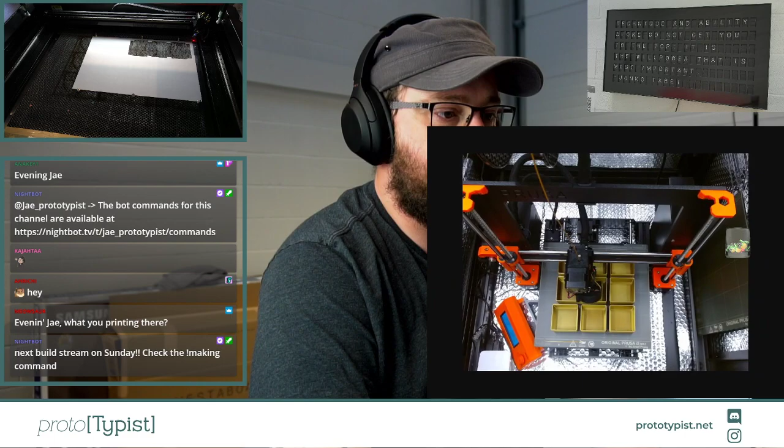So I'm printing a few things actually. Let me make one of these bigger for you so you can see. These are tubs based on different sizes for a series of drawers that I've got. I'll show you in a second what they look like - let me grab some and show you up close.

Excuse me, my hay fever is so bad today, I apologise guys. So I'm printing a load of these little tubs. I have thousands and thousands of screws and odds and ends, and a huge set of architect's drawers, a plan chest, and I basically made these to fit inside them. They're exactly the right depth of the drawer, they fit just nicely. I made them in all sorts of different sizes, so you've got like a 2-unit one. Some are even multicoloured so I can have different things in there and know what's in there if it's special. I've got loads of these - a whole drawer full. In terms of units, I should have 300 of these units.

This is a 1 unit - I should have 300 of that in the drawer. It's a thing and it's going well. They're all designed so that they stack together. We've got 3-unit ones, 4-unit ones, all sorts of different sizes. Basically they're going to hold screws, tools, bits - everything I could possibly need for any keyboard build, or any product I stock in the workshop that needs spare parts or anything else.

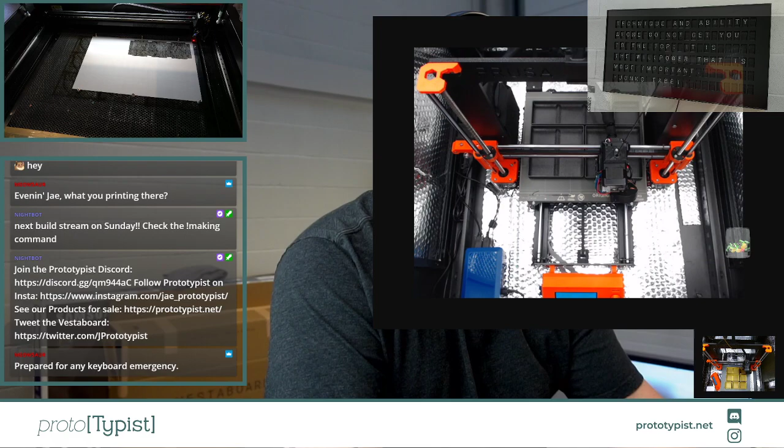The drawer is nearly 6 foot long, about 5 feet deep, but I'm only going to go about 3 feet deep into it with the pods. So that's what we're printing. We've got 2 printers going at the moment. On this one we've got a bank of 4 printing together, a bank of 3 printing across the back, and then 4 1-units as well. On the other printer, printing in gold filament, we've got 2 2Us and 5 1Us printing at the minute. They've been printing for about 4 days solid now, but they're getting there, slowly.

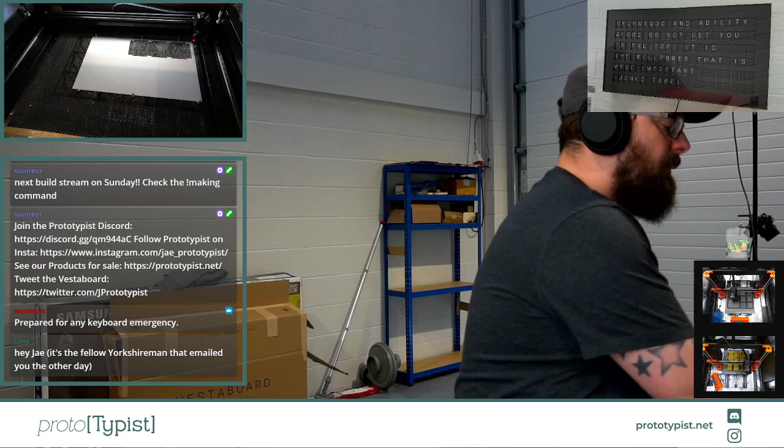So I can't show you the details here, but I do have a stack of orders. These are all customer orders. The plan is to try and get through all of these sheets of paper today on the stream, instead of just doing one order like we did last week, which was like 6 or 7 plates. We're going to try and bash through all of these orders today and get them all ready. Now, I can't show you the order details, and I can't tell you who they're for, or what keyboards the plates are for, but you're more than welcome to try and guess in chat. So if you see me cutting a plate and you think it's for a certain keyboard, I can't confirm or deny, but you can guess.

As you can see, we've already got a piece of material loaded in the machine. It's already had one plate cut out of it because I've been cutting plates all day long whilst we've been running the workshop and doing packaging and everything else. 600 orders in 2 days we've packed. 600 orders in 2 days, which is kind of nuts. It's kind of crazy.

We've already cut one plate on this piece of material. We're going to try and fit another 3 plates into it if we can, or if not, we'll definitely get 2. We'll get another one underneath, then we'll turn the workpiece around and do another one across the top on that thin bit. So you'll see we'll try and get another piece in just here, and then we'll turn the workpiece around and try to get another piece in just there.

We always cut horizontally on the laser for 2 reasons. One, it's slightly out in terms of being level front to back, so if you have a long piece, it does get slightly out of alignment front to back. That's a thing I can fix, and I will do that at some point. The other thing is that if you cut with the parts turned around vertically, sometimes if there's an issue with the laser and the CNC instructions don't go through correctly, it will make more of a mess of the work material than it does if you do it horizontally. So it's more about being efficient and keeping space more than anything else.

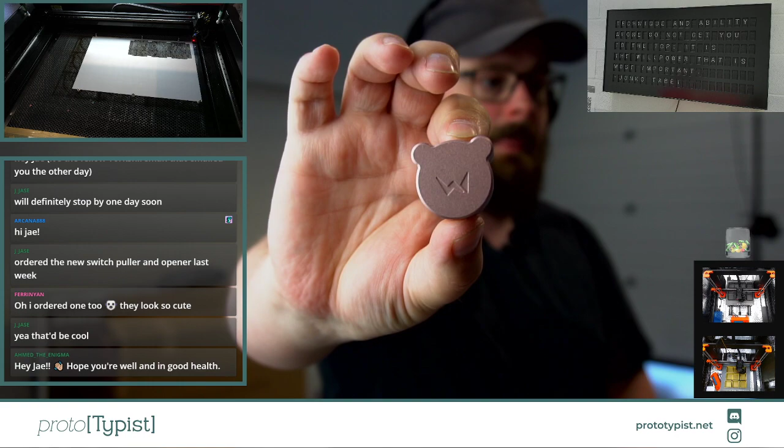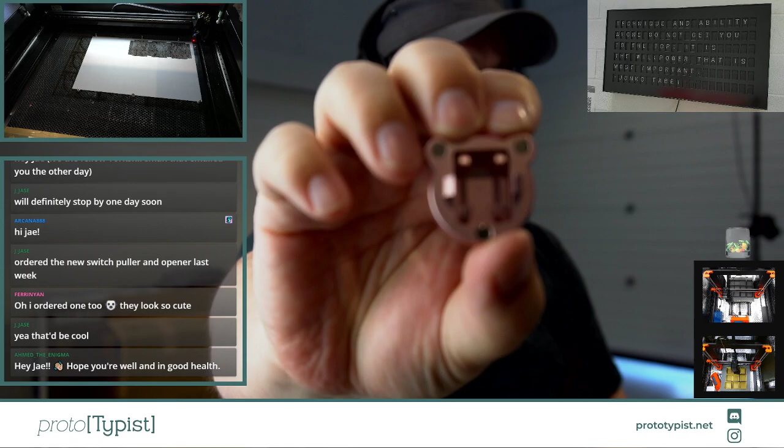And then inside, we have the little bear-shaped Wuque switch openers. This is the pink one. It comes apart, it's sealed around the sides, logo's only on one side's flat. These are held together magnetically, and inside you have an MX switch opener, which is super cute. And then on the other side, you have a Kailh switch opener. So there you go, that's what you get.

They're made of aluminium. And I apologize guys, hay fever, it's terrible, I can't breathe properly, so I do apologize.

But yeah, there you go. Made of CNC aluminium, these are all aluminium. They're super, super cool and super cute. The little bear design, it's both functional and it's cute as well. So it looks cute, but it actually helps you when you're holding the switch in there, because you've got a little ridge here that you can put your finger between, and when you're pushing the switch down it just gives you something so this isn't going to twist out of the way, because the ears help you hold it, I find. But yeah, really cute and really nice and well worth the money.

So there you go, almost sold out.

Ahmed's here as well, he says hey Jae, hope you're well and in good health. Yes, my back's getting better, it's slowly getting better, it's not 100% yet. I can't lift anything heavy, which means that the bathroom renovation that you guys might have been following on Insta is still on pause. I can't lift the tiles to tile the bathroom at the minute, but hopefully soon. We'll see how that goes.

Drexler's here as well, hey man, good evening, good to see you, thank you very much for being here.

Okay, so let's load up the software, the Fusion software, the Lightburn software that we're going to use today, and I'll show you guys how that works.

There we go, so you can see we've already got the plate file that we've cut out earlier on. What we're going to do is get the next plate file ready. You guys won't be able to see this in detail, but I'm just going to get the next plate file ready, I have to check my paperwork and make sure I've got the right one. Okay, so I'm going to drop this file in, and you'll see that a file's now appeared in here. Now we know that we need to make sure it's in the right position. So we've already got a piece cut out, and we know that the yellow is the piece that's cut out. So I'm just going to move this so it's roughly underneath where it'll be on the piece of material, on the workpiece that's in the machine.

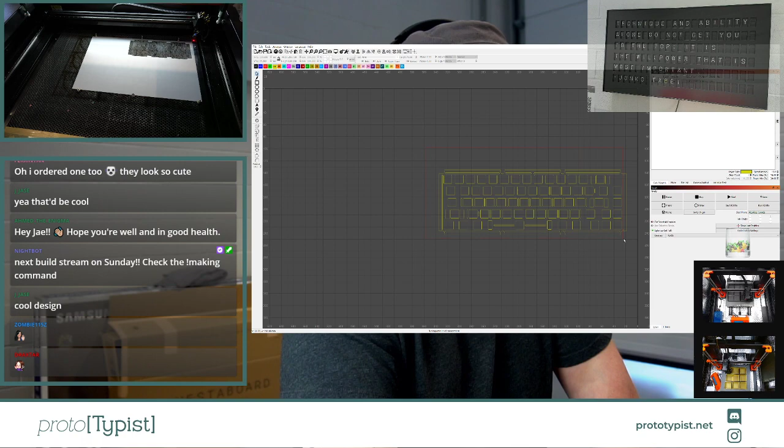Now we don't want to cut the same plate at the top again, so we're going to remove that. The other thing we're going to do is flip this plate round, so now it's in the correct orientation. You've got the ANSI enter on the right hand side, and the full left shift on the left hand side.

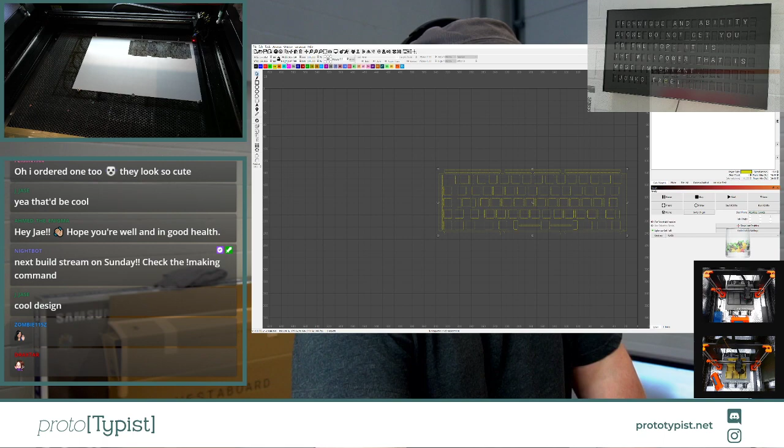Because the laser kind of melts through the plastic a little bit, we're going to flip that plate over so that from the other side you won't see the melt marks. The side that goes down towards the PCB will be the side that has the melt marks, and the top side will be nice and clear. So I'm going to flip that over, and there you go - that's basically now cutting from the top side down.

Once we've done that, we're going to click the send button on the far right side of the screen. That's going to send it over to the laser cutter. Then I'm going to pop over to the laser cutter, and on the laser cutter there's a setting - I can't show you this - that basically makes sure all of the correct parameters are being carried across to the machine. Nice and simple.

Okay, and that's it. We're done in Lightburn for now.

Let's pop over to the other camera so you guys can see it up close. So there's the laser bed, you can see it up close.

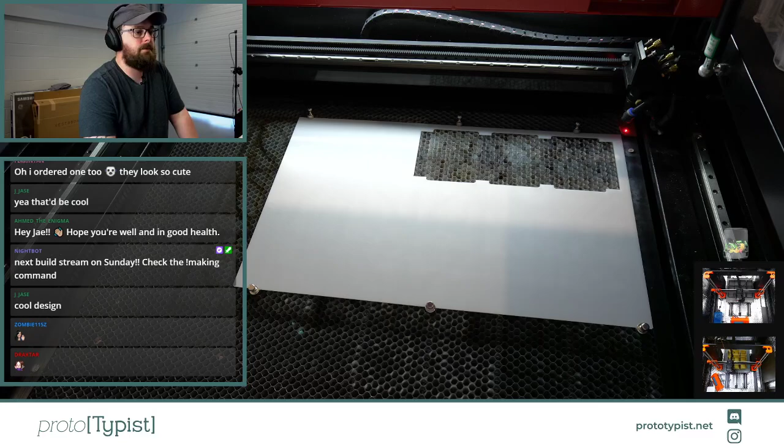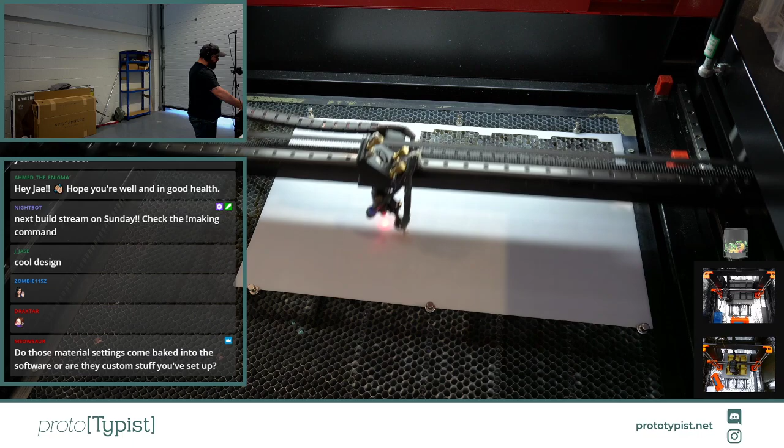The next thing I'm going to do is frame where the laser is going to cut, so you're going to see where the laser is going to cut this file out. That red dot is pretty much where the laser is going to cut. We can see it's going to cut nicely in this area. It's not going to overlap lines we've already cut, but it's not going to quite give us enough material on the bottom to get another one through.

We'll start that going anyway, and that's now going to cut, so you guys can watch the laser cut through the material.

Zombie's here as well, he waves. Hey man, good to see you.

Meow asks, do those material settings come baked into the software or is it custom that you've set up? So no, every laser is different. You could buy the same laser from the same company, we could buy the same laser at the same time, Meow. You could buy exactly the same model, no difference in power output, no difference in properties or anything at all. The issue you have is that both lasers would have different settings for different materials. So one laser might need 12% power to cut through a part, one laser might need 10% power to cut through a part - it's always different.

So what you have to do is set all of those parameters yourself, and you have to make sure you control those parameters across the laser's life cycle as well. Over time, the laser's power is going to degrade, and you need to account for that too. Every material is different, every manufacturer of material is different. If I go to a different POM supplier, it's often very different settings that I need to use and tweak. So yeah, it's not the same from laser to laser, unfortunately. It is very, very different.

The only way to find out those settings that you need is by trial and error. There are some good templates you can use to get a good idea of where you need to be, but you generally need to work away from those and narrow down on each material that you use. Different batches of the same material can need different parameters, so you have to always make sure you order more material than you need, so you've got plenty to test out the settings with.

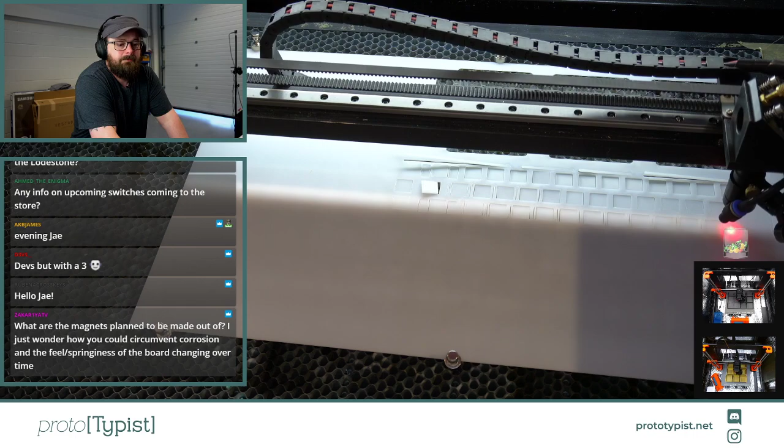Zakariya asks, what are the magnets planned to be made out of? I just wonder how you could circumvent corrosion and how the feel and springiness of the board will change over time. So the magnets we're using are rated for 50 years at their current tolerances. I don't expect anyone will be using a Lodestone if they buy one in 50 years. I suspect most of them will be long gone and using some new input methodology by that point, but they will last 50 years, that's what they're rated for. In reality, they'll probably last a lot longer than that.

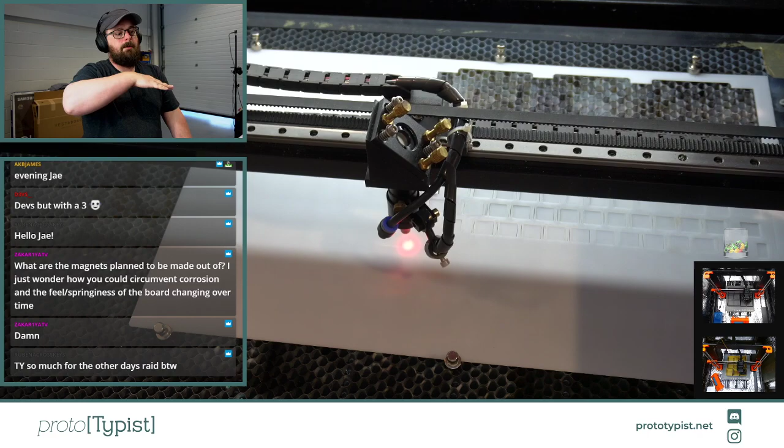As you can see guys, it is cutting all of the switches first. It will cut everything inside the perimeter of the part first. That's so that if it cuts the perimeter and the material warps from the heat, it won't affect the switch positions. If you cut the outside first and the material warped, twisted, changed, or bowed, then when you cut the switch areas they wouldn't be in the correct place, they'd be slightly out of position. So we always cut the switch area first.

You can kind of see it lifting just there where it's doing that part now. It's actually the part that it's cutting around, like a thin strip that's cut out, but that thin strip is bent up while the rest of the material stayed the same. So it just makes sure we're not getting areas where the switches are going to be out of alignment.

But this is quite a complex plate, there's lots of small cuts on this one, so this is going to need a fair bit of post-processing. The other part about laser cutting is everyone thinks you take the parts off the machine and it's done. It really isn't, it's not that simple unfortunately. This will need some post-processing, but it's almost finished now, so we'll see how it goes.

If you guys have got any questions on laser cutting, calibration, or indeed anything keyboard related, please do ask. I'm an open book when it comes to stuff like that.

Okay, so now it's cutting one of those thin relief cuts on the edge. It's going to do this one, I think it's done the one on the other edge already, but once it's done all of these, it's going to cut the outside edge of the keyboard.

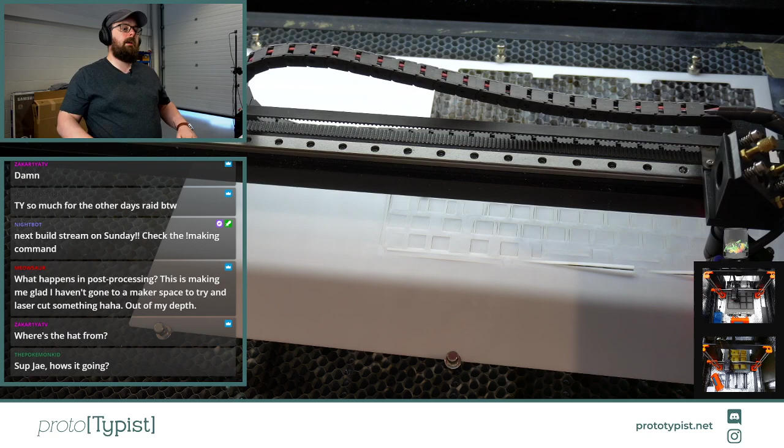What you see on the screen that looks a little bit like smoke isn't actually smoke, it's basically dust. POM gives off a lot of dust when you cut it, and that dust settles back onto the part. So the first thing we do is put it in an ultrasonic cleaner. We put about 10 plates into racks inside the cleaner, and that gives them a clean, getting rid of all that dust. I'll show you on this plate when it's finished up close what that looks like.

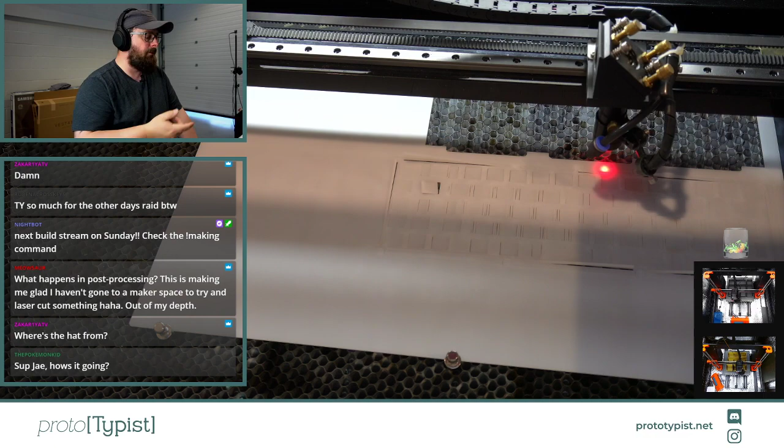The second thing we do is test it for fitment and make sure switches fit in there correctly before we ship anything out. Sometimes the laser gets things wrong, sometimes I get things wrong, sometimes the maker of the plate gets things wrong. Sometimes things just don't cut right. It all depends, so we always test it and make sure switches hold in.

The third thing is, when I pick the part up in a few seconds there we go, it beeps, it's ready. When I pick it up, a lot of the parts will fall out and stay behind in the machine. You'll see that a lot of the switch cutouts have remained there. However, a lot of the thinner parts you can see on camera here will just remain in the part and you have to manually remove them. Sometimes they get a little stuck because they're actually partly embedded into the part itself.

Let's switch cameras back and I'll show you what I mean. If you look closely, you'll see that some of the really thin parts, like here or here, remain inside and you have to pop them out. So that's a little bit of post-processing work as well.

If I can get the light just right, you might be able to see there's like a thin film all around the edges of the switches. As I wipe, it kind of goes away, and there's a little bit of dust on my finger. It's hard to show you guys on camera, but it is there. There you go, now you are immortalized on the Vestaboard. So basically post-processing is to tidy up all of that, and then we give it a clean as well.

There's lots of different parts to pop out, and it's really simple, you just hold them and push them and then they come out. It's dead simple, but it's just another thing we need to do. The reason is because the gaps are so small. As it cuts one side, it cuts it cleanly, and as it goes around the other side, it actually cuts again and melts the first part back together just because of the heat.

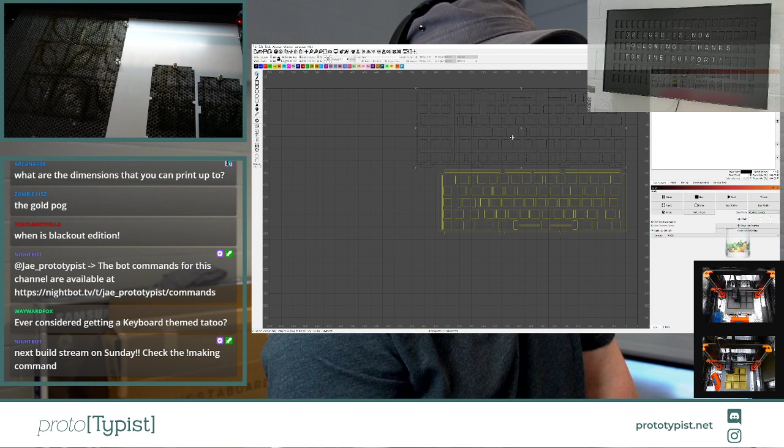Okay, I'm going to drag that into the software. You guys will see that appear. I'm just going to move it so it's out of the way so we can see exactly what we're doing. This is the file that we need to cut. Now I can already tell instantly that this is not going to fit on the workpiece that we've got in the machine right now, so we're going to take that out.

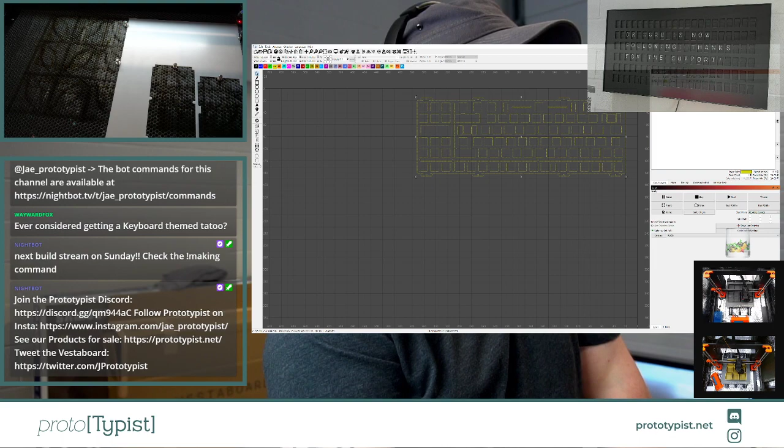We've set it to cut into our POM settings, so that's all nice and sorted. Now we're just going to position it on the board, and make sure it's the right way round and the correct orientation. So we're going to arrange that, rotate it until it's correct. You can see the ANSI enter is on the right hand side of the board as you'd look at it top down. But we're actually going to flip it over and make sure it's flipped horizontally, so we're cutting from the bottom side, and the top side is what's flat into the base of the machine. That's how we're going to cut it. So now that's all sorted.

We're going to send that over to the machine. Now that's already banked in the machine, we don't need to worry about Lightburn for a few minutes. We can get rid of that. Let's flip back over to the camera.

Okay, so now I know that this piece of material isn't going to be big enough to hold it, and I'll show you that, guys. I'm just going to configure the machine now. There we go. If I frame this part now, you'll see it's never going to fit in that gap. The laser wants to go all the way around it. So we're going to take this piece of material out and replace it with a new piece.

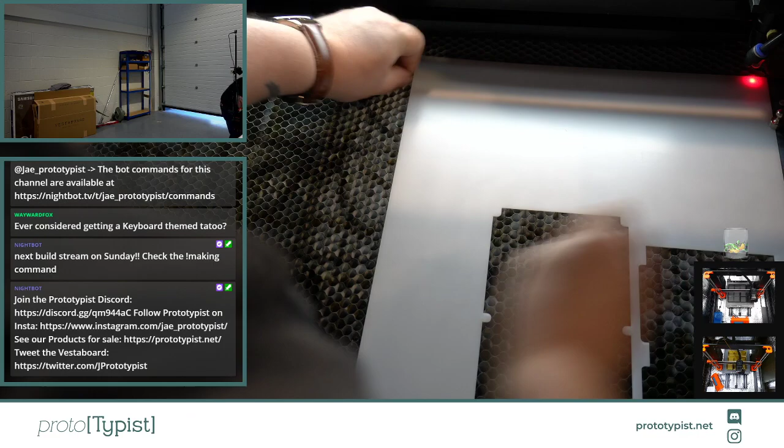We'll keep the piece of material though, because we'll definitely be able to use it for another part. Put in the new material. We're going to pin this in place with some magnets, making sure everything's in correctly.

Okay, and now we're going to frame that and see if that will fit. That all looks really good, so now we're going to start that going.

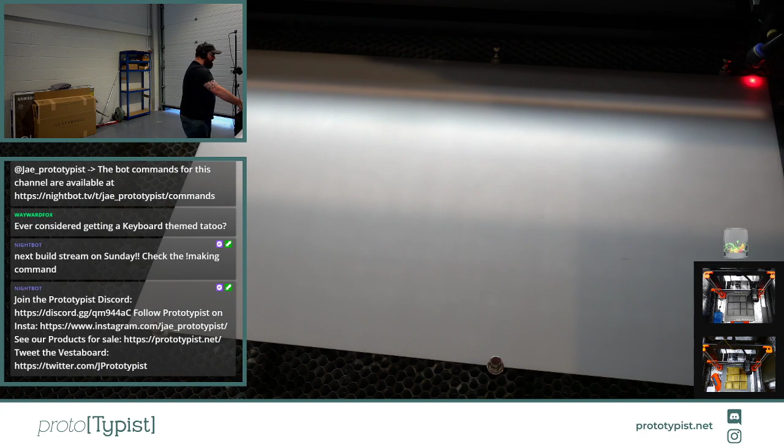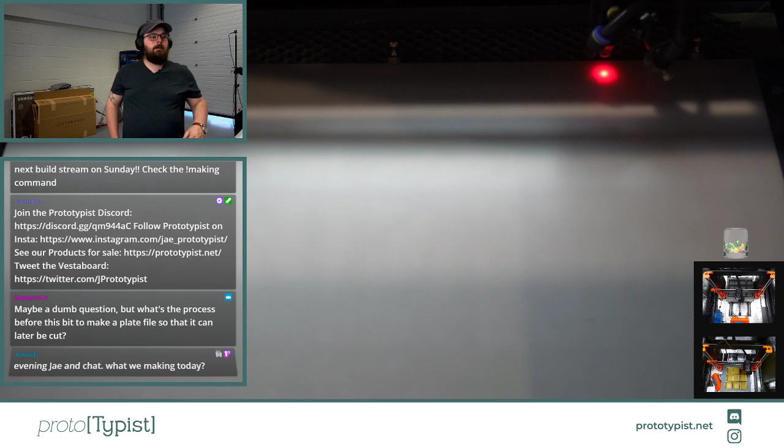Just adjusting the camera, guys, so you can see that a touch better. There we go, just zoom in a bit as well. So you guys should be able to see that cutting nice and clearly now. It'll get closer as it comes forward, and the camera will focus. There you go, you can kind of see it back there. Let's turn the red light off, maybe you'll be able to see it a little bit better.

Just because we're cutting in the depths of the machine here, as it comes closer you'll be able to see it a little better. Maybe we'll be able to do a 45 degree case - you'll have to send me an email with the files on it, and I'll take a look.

The gold POG, yeah, the gold prints really, really nicely. It's on the 3D printer right now. It's Prusament, and I think it's called... I can't remember what it's called actually, but it's not gold, I think it's called bronze. But you can see it 3D printing on the printer right now. There you go, it's the gold printing there as well.

When is Blackout Edition? Soon, sooner than you'd think, not too far away. Ever considered getting a keyboard themed tattoo? I have loads of tattoos, I'm covered in them, and yes, I have considered getting a keyboard one, and it will happen. I'll actually be getting two in the near future, I think. So yeah, that's not too far away.

Zakariya asks, maybe a dumb question, but what's the process before this bit to make a plate file so that it can later be cut? So it really depends on the plate file and what you want. Sometimes the customer would like it to have a certain layout, which means we take the original file and make sure it's adjusted for that. There are also certain tolerances that the machine can and can't cut, so we have to make sure the plate's adjusted for that, depending on the material and process going through. If it's CNC, it's different to it being laser cut, and carbon fiber is different to aluminium, for example. There's all sorts of different restrictions based on the material and the process that's going to make it.

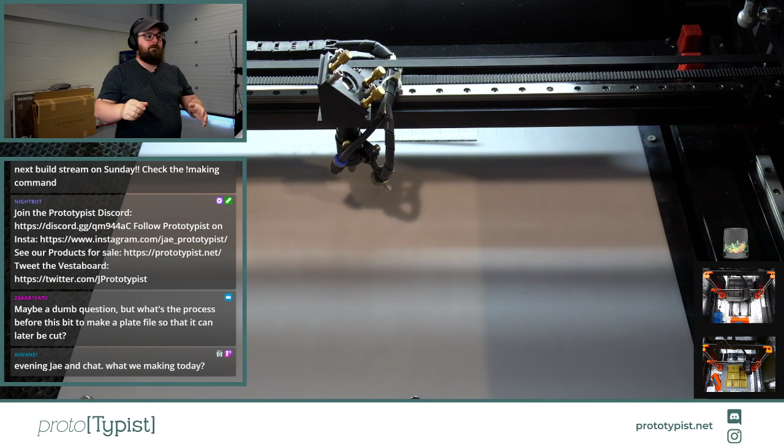So if you imagine, it doesn't actually go like that - it actually crosses over, it's basically like rail tracks that are twisted round. If you remember back to physics in school, you'll probably remember something like that.

So the issue is you want to make sure it's in that bit where it's at its thinnest, and to do that we have a tool that we made for the laser. We worked out the point where it's actually at its thinnest, and then I made this on the laser itself, which is the laser focus tool for prototypists. This is the depth it needs to be from the edge of the laser to the workpiece material, irrespective of the thickness of the material - this is to the top of the material, and that puts the laser in the correct spot. So we always use this, and then we can raise or lower the bed depending on the thickness of the material to make sure this is in the correct place.

So there are lots of things you need to do to make sure you're cutting your plate correctly.

Aiwanei here as well, he says good evening Jae and chat - what are we making today? We're making keyboard plates, dude. Keyboard plates - of all the things, who'd have thunk it, right?

If my hay fever holds out - that doesn't get too bad, because it's really, really, really bad today.

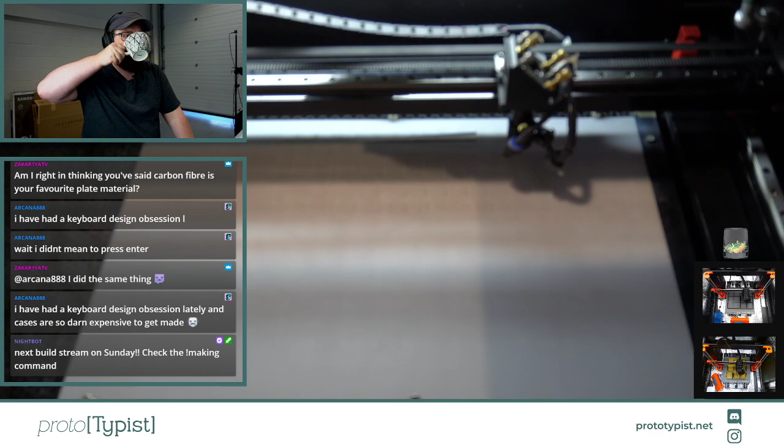Arcana says, I have had a keyboard design obsession lately, and cases are so darn expensive to get made. Yeah, you need some good funding behind you if you're going to start prototyping cases, unfortunately. It's not cheap, sadly, I wish it were cheaper. Maybe one day I'll be able to offer a cheap case prototype service when I get a CNC machine, maybe. 30 quid, well, we'll do a 3D printed one for less than 30 quid, Arcana, so don't worry about it. It'll be the cost of the filament, the cost of the electric, and the cost of the shipping to you, which shouldn't be too much. So don't worry, we'll be all right, we'll get you a 3D printed one made.

The other thing you guys might have noticed as well is that POM sometimes squeaks when it gets cut. You might have heard it in the background. Sometimes it makes a squeaking noise. Not all materials do that, POM is a very weird material that makes a squeaking noise sometimes.

So you're getting a water jet to cut CF, right? No, I wouldn't cut CF on a water jet personally anyway, I've seen what it does and I don't like that, it fractures the carbon fiber. What I would do is get a flatbed CNC, and at the end of the mill the material will be under a thin layer of water. So I'd probably make sure I had a good 40mm long bit into 1.5mm thick material, and I'd make sure I had a good 3mm or 5mm of water over the top of that to just keep all of the dust inside the water so it doesn't flick out of the parts.

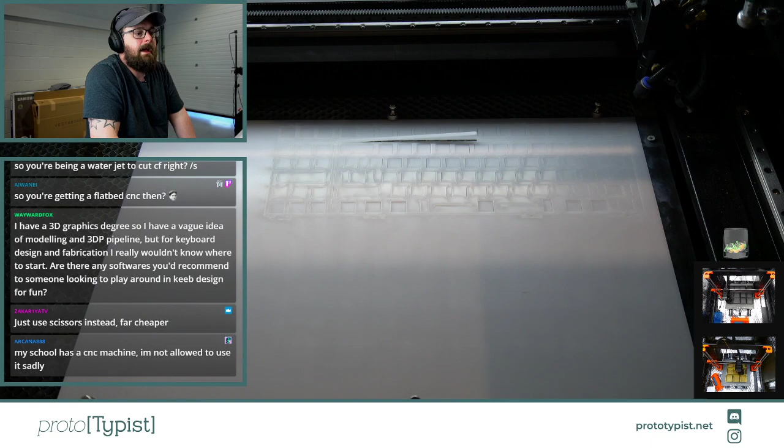Wayward Fox has a really good question. He says, I have a 3D graphics degree, so I have a vague idea of modeling and 3D printing pipelines, but for keyboard design and fabrication I really wouldn't know where to start. Are there any softwares you'd recommend for someone looking to play around in keyboard design for fun? Yeah, so Fusion 360, you can get a license for free if you're a student, which is usually quite good. There we go, the machine's finished. That's how I started out, and I'm not a designer.

I don't really do CAD work, as anyone will attest to. I'm not what I would call a true designer, or worthy of the word designer in any shape or form, to be honest. But Fusion 360 is what I'd recommend.

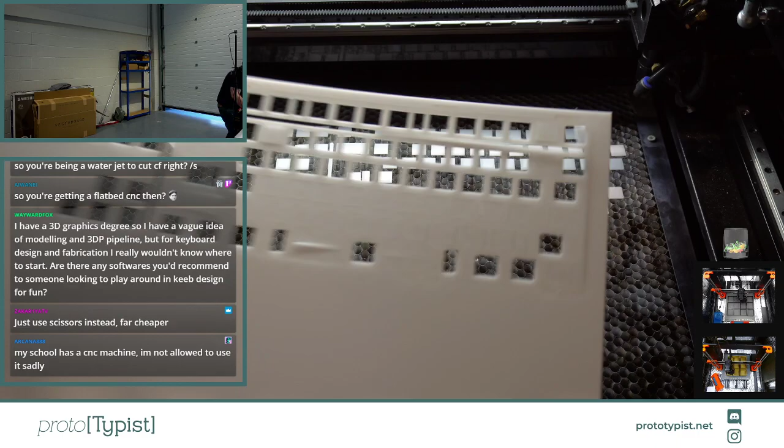You can get a license for free, and it should do you well for most of what you need. There are some good guides on YouTube in terms of how to get started with that kind of stuff.

There was a good one from, oh gosh, I can't remember the guy's name. James, help me out - who did that really good keyboard design? He did the Q board, that's Kyuu, if you search for that you might find it. Quantrik, that's the name I couldn't think of. Thank you, James.

So if you search for Quantrik keyboard design on YouTube, you should find the video. I wouldn't say it's a good guide, but it gets most people going - it teaches most people what they need to know in terms of Fusion. It's quite basic in terms of skill level, but it's not a bad start, and it'll get you into most of the mechanics of how keyboards are manufactured.

The rest of it is a lot of trial and error. That kind of design is trial and error, making things that you like. That will give you a good solid start.

The Keyboard Atelier Discord as well - that's run by a designer called ai03. That's also a good place with lots of resources in there. I think a lot of it is over commercialized in that area, but yeah, there's definitely some good resources there.

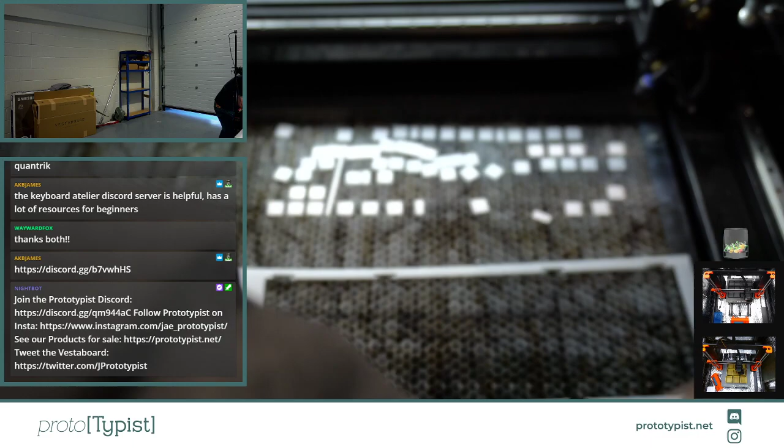Okay, so we're just going to clean up the workbed now, and then we can move on to the next file whilst we post-process the file we've just cut.

Put the workpiece back in, pin it down in place.

I do apologise, guys, my hay fever is so bad today. I feel like I'm really sniffly. It's not good, it's not good.

Adam says, not surprised to hear you're a bit down on Quantrik's guide - I understand the Kyuu files need a lot of work to actually be used for production. I've never taken a look at them, but I've heard the same. I think Quantrik's guide is good to get you going in Fusion, but I don't think it teaches you all of the parameters and areas you need to look at. But it's a good starting point - it gets you into that kind of frame of mind and thinking.

GeonWorks also has a really good set of streams where he shows design and how he models in CAD and Fusion and multiple other softwares as well. So he's always one worth checking out too.

Charue Designs did a limited non-profit run of it called the Chyuu. Yes, I heard about that - I didn't see it, but I heard about it. It's not a design I like, so it's not something I'd be interested in personally.

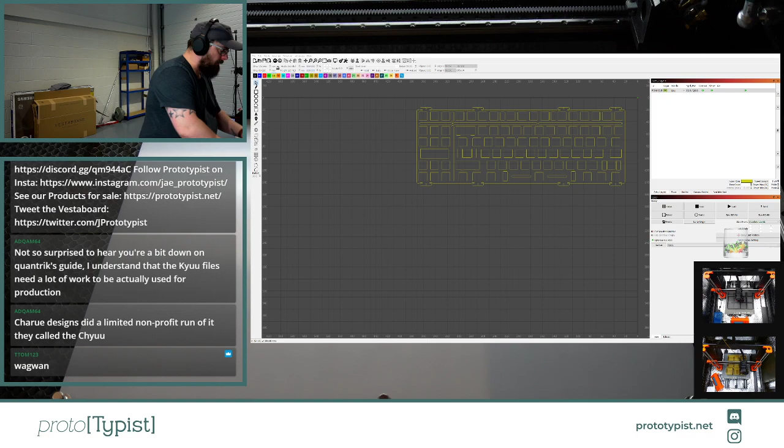Okay, so I'm going to drag that into the software. And we know we need to position it just underneath the last piece, so we're going to use that as our guide.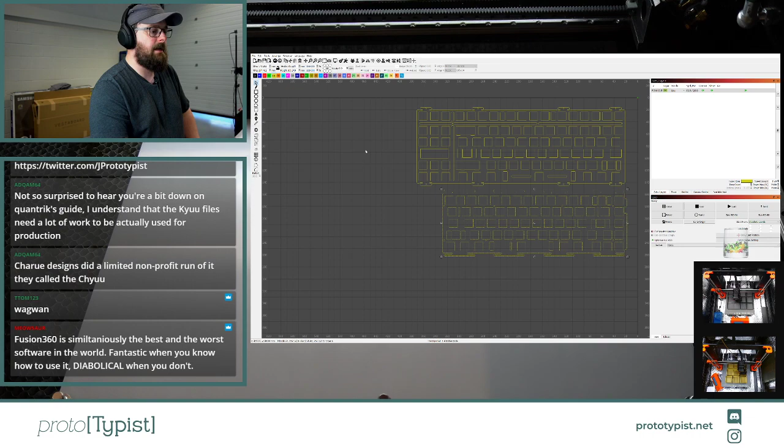We're going to make sure it's set to cut POM. We're going to get rid of the old part, and then we're just going to flip this part over as you've seen me do before, so we're cutting from the top side down. So we're just going to flip that along the horizontal axis, and then we're going to send that over to the machine.

Then we're going to step over to the machine.

And we're going to check that that fits. So I'm just using some of the buttons on the machine to make sure that actually fits in the correct place.

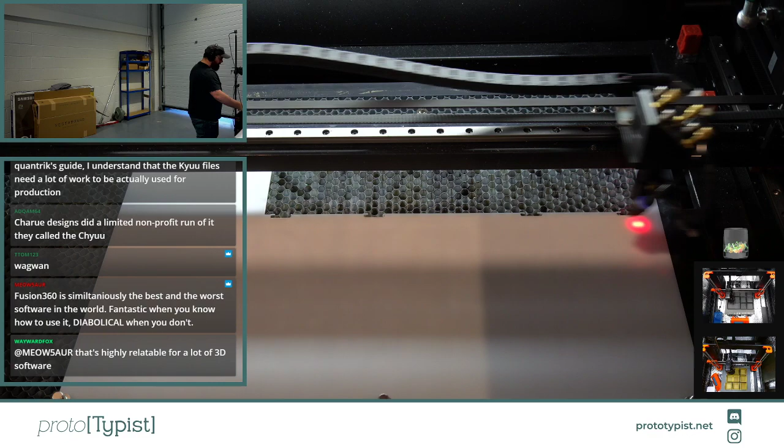All the parameters are there correctly. And then we're going to frame it. So this is where it's going to draw it. This is the area it's going to cut the plate in. All looks good, I'm going to hit start.

And we're going to let that run. And whilst that's running, I'm just going to do post-processing on this plate. This is basically just me popping out all of the small parts that have remained in place during the cutting process. Most of these come out without issue. Some of them are a little bit tight or have slightly bonded back when they've melted, but most of them come out without issue.

Tom says, Wagwan, I have some of your stuff here, Tom. I haven't finished QCing it, I haven't found the colour that you wanted, but when I get to it, I will ship it out for you.

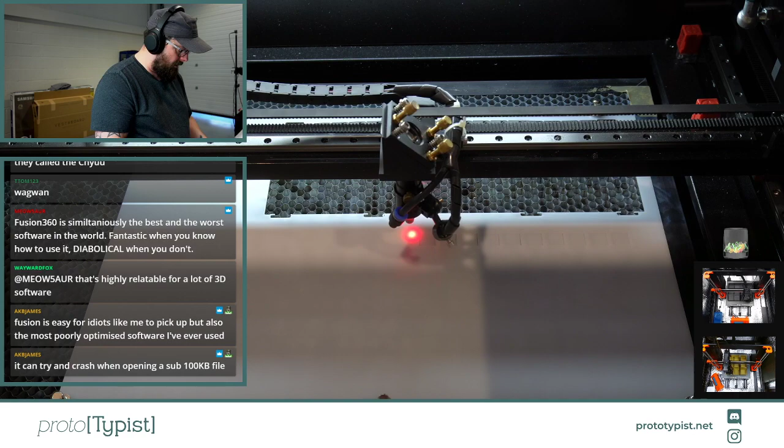We're making plates today. POM plates, in-house POM plates.

I apologise, Tom, I just haven't got around to it. I haven't got through them all yet. There's just so many to get through. We've posted like 620 odd orders in the past day. It's been a little bit nuts.

The Vestaboard is updating, let's see what's going on there. Oh, new sale, I'm not supposed to show you these, but there you go. Someone's bought something from the site. There we go, nice and easy.

Meow says Fusion 360 is simultaneously the best and the worst software in the world, fantastic when you know how to use it, diabolical when you don't. Yeah, some of the simple stuff is the hardest to find as well, and what you think are the correct search terms in Google for it are not. So I fully appreciate that difficulty with Fusion.

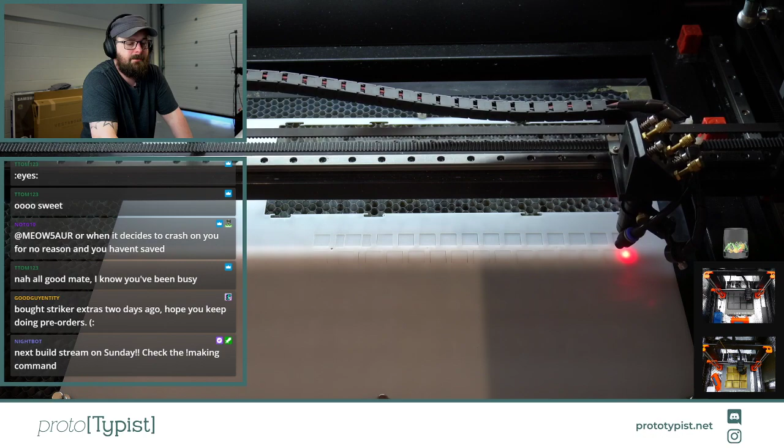James says, Fusion is easy for idiots like me to pick up, but also the most poorly optimized software I've ever used. That's very true. It's much better on a Mac, I have found that, but not everyone wants to use a Mac, so that's fine. Gio says, oh, when it decides to crash on you for no reason and you haven't saved. Well, always save your work then, dude. Always save your work.

Good Guy says, bought Striker Extras 2 days ago, I hope you keep doing pre-orders. Yeah, we'll have more stuff up for pre-order soon. Sorry, someone's just outside. We'll have more stuff up for pre-order next week, I think. I just need to prep them. Once the GMK invoices have been paid, that's when I like to put things up for pre-order, because then I know manufacturing is taking place, it's in the queue at that point, right? So yeah, more stuff will come in soon.

Fusion has crashed possibly a total of 2 or 3 times in the past year for me on Mac. Yeah, I have a Mac Mini that's quite high powered here, and when I use that, it's much better for Fusion. But the problem I have is everything else I need is on Windows. Like the software I use on the laser cutter, it's only available on Windows. So everything in the workshop has to be on Windows. It's just one of those things.

It's not that bad on Windows. I think it all depends on the spec of the machine. I think it does depend on the spec of the machine. Which reminds me, James, we need to talk about getting you a better machine. That's something we need to talk about and arrange. So we'll have a look at that in the next couple of weeks.

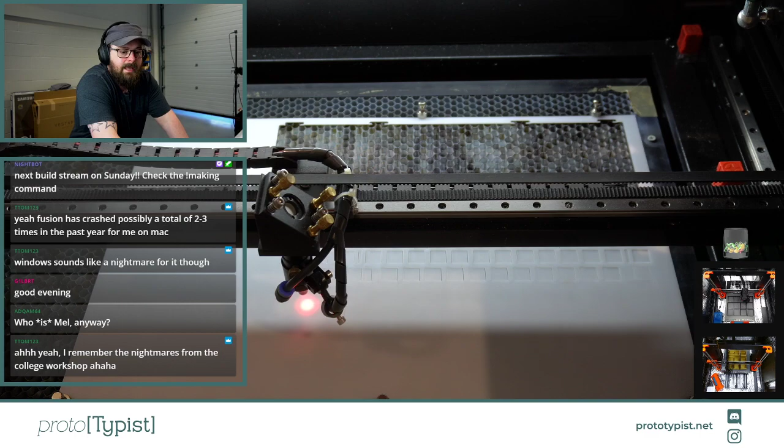Adam says, who is Mel anyway? Mel is my workshop buddy, she comes and helps me package stuff, she's a good friend. She was part of the keyboard hobby a long time ago. She actually joined me on my first ever stream, which was back in 2016, I think, 2017, which is when I used to stream under a completely different channel, which I can't access anymore because Twitch is Twitch. But yeah, my first ever stream, she joined me, and we did the HS60 build stream for MechBoards. That was such a long time ago, I think we had like 4 viewers, and that was done in my office at home. But Mel used to be a fan of the hobby, she used to collect things. She dropped out of it a couple of years ago, but then when I set up Prototypist, she offered to come and help me because she lives relatively close, and she can always pop over and give me a hand packaging stuff. So yeah, she comes and helps out a couple of times a week now, as and when she's needed, on a very much a tentative basis. There's no set hours or anything, but yeah, it's good for her, it's good for me, and it means that we get stuff done.

James says my ears just pricked up. Well, it's only right, we'll have a chat about it this week. We've got some other stuff to do tomorrow as well, James, so we'll have a chat about it while we're doing that.

Tom remembers the nightmares from the college workshop. So many tools and products have to run on Windows these days, and there's no Mac equivalent or otherwise, and it does make it really, really difficult sometimes, but we just have to get on with it.

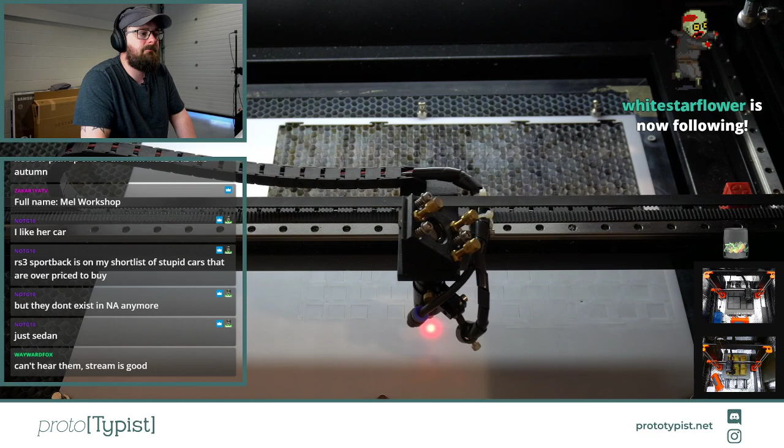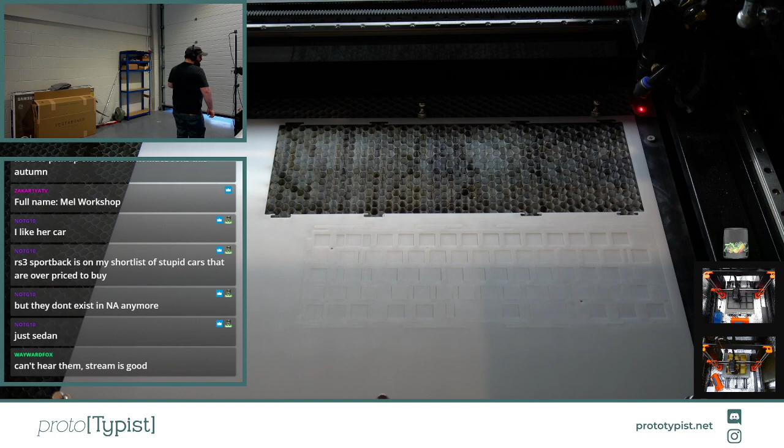There we go, next plate file is done. Wayward Fox says can't hear them. The stream is good, glad to hear it.

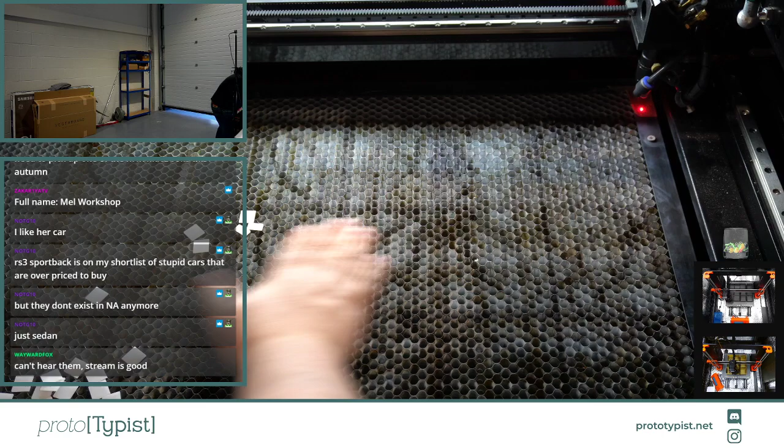We're probably going to have to remove this piece of material anyway, so let's do that just now. Take out the material, we need some 60% plates to cut, so we get some 60% plates, we're able to use these last 2 bits of material in portrait mode and get them cut nicely.

Okay, so I've got a little pile at the front now of spare chippings material. Let's put another piece of material in there and then get the next piece cutting.

The material I'm using here is actually offcuts, these aren't the pieces of material designed for this machine. But because we're doing a stream, we're only cutting very, very small files, and we're doing one at once basically, rather than setting 10 or 12 going like I would do normally.

These pieces of material are just the right size, normally they fill the whole entire bed. So if I zoom out, you guys will see - normally the piece will cover here and it'll come right down to the front this way as well. It's usually nearly double that size, maybe a little bit bigger even, so we can get 8 plates in total. But yeah, for the streams this size it's probably a little bit better to cut.

Okay, so we've got another workpiece in, it's all looking good. Time to jump back into the software and add in the next file.

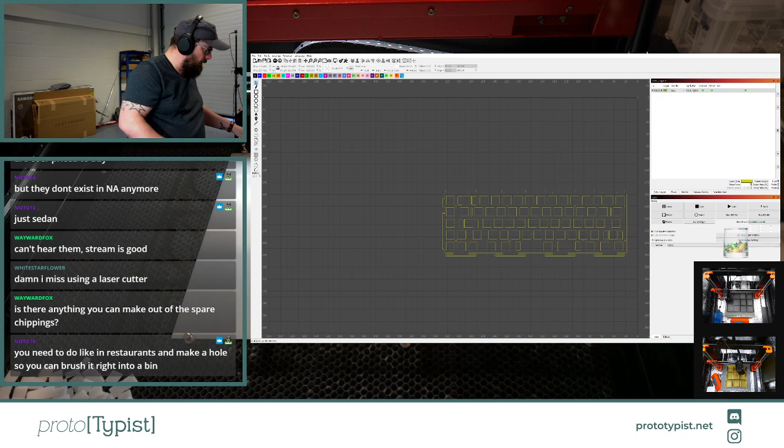So, what is the next number I need? Okay, so I'm just going to find the next file that we need, and then I'm going to grab it over.

Okay, so this has got 2, so we're going to drag 1 in, and we're going to set both of these cutting at the same time. So I'm just going to move that around, I'm going to put that right where it needs to be.

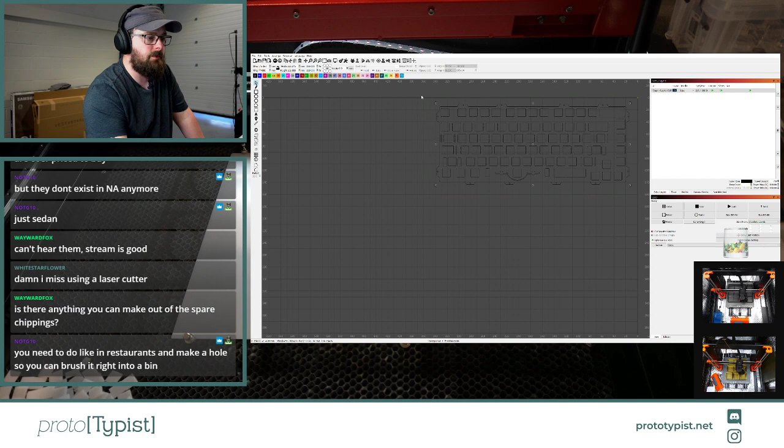We're going to delete the part that we've already cut once, we don't need that anymore. Just need to drop that down just a touch, just so it'll fit in the material. And we're going to set that for POM, which makes it go yellow. And we're going to flip that on the horizontal axis, just like so.

This order's got 2 files, so we're going to drag the second one in. We're going to make that yellow as well. Now this one needs rotating, so we've got the right way round and we can make sure everything's cutting correctly. We're just going to rotate that clockwise. We're going to then move it into the correct position to cut. And then we're going to arrange it by flipping it on the horizontal axis so that we're cutting from the top down instead of the bottom up.

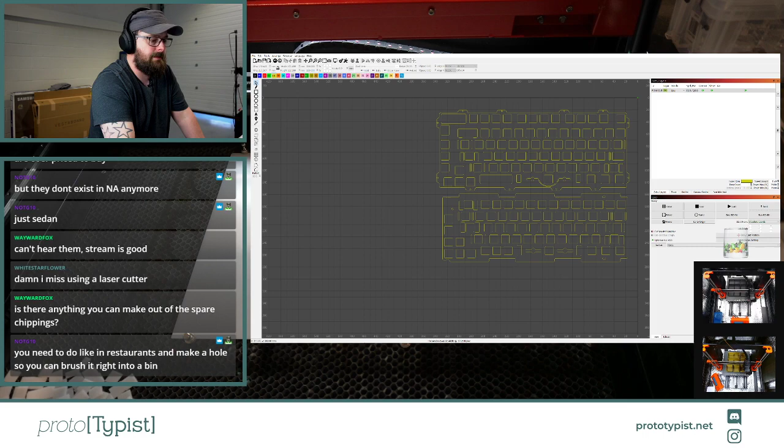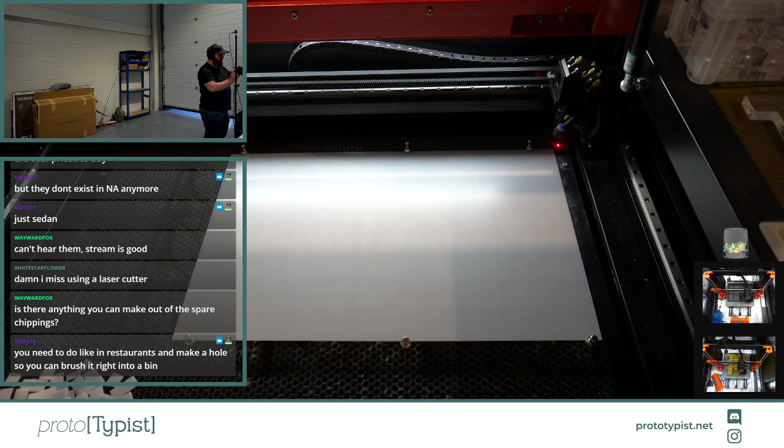Okay, we're going to send that over to the machine. And that's now in the machine. So let's see how that's going to appear on the workpiece, adjust the camera just a touch. There we go.

Okay, that's the setup done. Let's frame it and see where it's going to cut. That looks good. So we're going to hit the start button and away we go.

Damn, I miss using a laser cutter. Dude, it's my favorite tool in the workshop at the minute. It's passed only by the imaginary CNC that will arrive one day. You can do some really basic stuff with laser cutters, and then you can get really, really advanced stuff done as well. They're like the multi-tool of the hobbyist workshop, I feel. You can do so much with them.

Etching, cutting. Okay.

Okay, now we've got a stubborn piece that won't pop out, so we're going to use the little knife. Be careful if you're ever using a bladed instrument, guys. There we go. One more. Okay, this one doesn't want to come out either. There we go.

Okay, and then we have another plate, all cut nicely, even, and great.

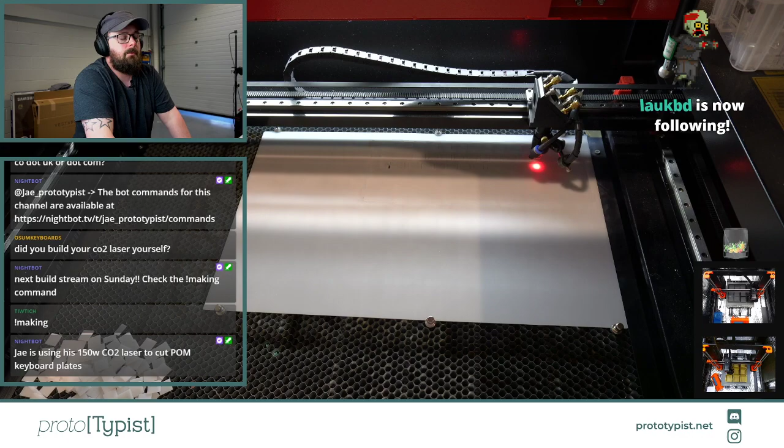How come Prototypist is a .net instead of a .co.uk or a .com? Prototypist is a .co.uk and a .net. It just forwards you to the .net site if you go on there. But Prototypist.co.uk is owned by me as well. Yeah.

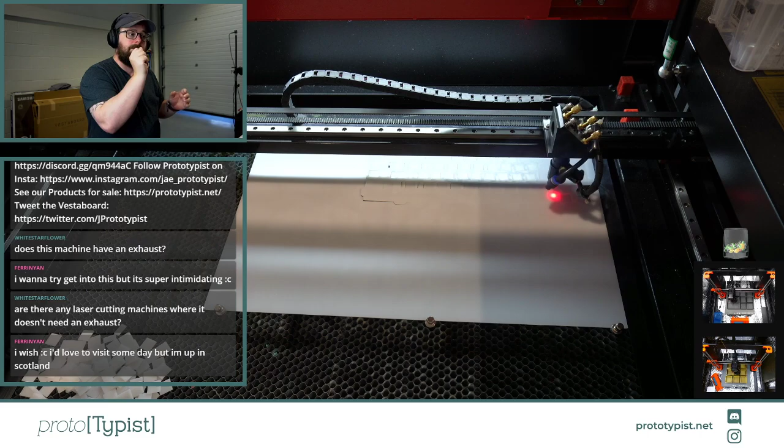White Starflower says, are there any laser cutting machines where it doesn't need an exhaust? So yes, you don't have to use an exhaust with these. You could just let it cut and not use an exhaust. But the issue is that when you open the lid, fumes are going to get into wherever you're cutting it, and fumes really smell and take a toll on you. All of this dust you can see coming off, it looks like smoke or steam coming off the part, that's just fine dust, and that's because I've got the lid open. Normally it would just be sucked away if the lid was closed. That really isn't nice to breathe in, it's not good. I would generally recommend, if you're going to use one, to use it outside if you don't want an exhaust, or make sure you've got an exhaust that goes out a window. It should be dead easy for you to get some power near a machine, near a window, and have a table near the window with an exhaust going out of it. That has to be a number one priority, just from a health and safety perspective.

Scotland's not so far, you can drive down. I'd love to be able to visit a meetup or something similar, haven't done any keyboard related things in person yet. So I'm actually going to have an open day at Prototypist at some point in the near future. It will be limited because the space isn't massive, so probably limited to 30 people, but I do intend on having an open day here at some point in the near future.

What's the laser you're using right now called? It's called the Chinese red and black 150 watt laser. It doesn't have a name other than that, unfortunately. It is very much a Chinese machine though. Let me read you the front, the control panel. This is literally what it says: the guide rail and the transmission part of lubricate, weekly maintenance time. I swear to you that's exactly what it says. Let me take a picture of this and show you guys, because I swear to you that is exactly what it says.

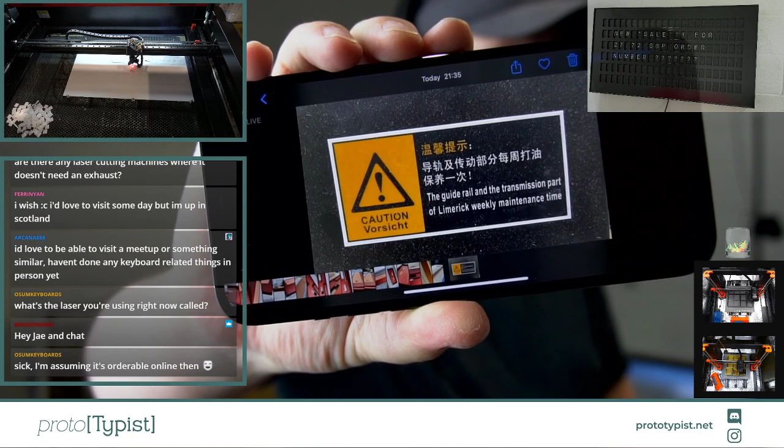Okay, let me orientate this correctly. Let's flick over to the other camera. So here you go: the guide rail and the transmission part of lubricate, weekly maintenance time. There you go, yeah, it's available to order online. This particular machine was about 5,000 British pounds, including all import fees and everything else needed, but it was about 5,000 pounds.

Moose is here as well. He says, hey Jae, hey man, good to see you.

White Star Flower asks, what if the place I'm staying in is not on the first floor? Will it still be safe to use an exhaust where it's releasing those tiny particles? Yeah, it's okay to go outside. Most of the tiny particles get sucked down into the base of the machine, and you hoover that out every couple of weeks. They won't actually get pushed outside. You can see them come off the material every now and again and then just drop almost immediately - that's the suction pulling them down. But you want to get the fumes out. There's often smoke if you're cutting plywood. If it's acrylic, it smells like a nail salon, a really sharp smell, so you want to make sure that's not there. Basically a lot of it's to push the fumes outside. Once they're outside, it's okay as long as it's not somewhere with heavy foot traffic. This is an industrial estate. This is my workshop, it's 2,200 square feet. Pretty big, so plenty of space.

Is it not super cold in that workshop in winter? Yeah, it's super hot in the summer, super cold in the winter. I do have an office - the wall directly behind here, if I spin the camera a little, this is my desk. Behind this breeze block wall there is my office space. That's where I stream from pretty much all the time - when I'm doing keyboard builds, that's where I stream from. But the workshop itself is pretty big. You'll see the light I've got turned on, but if you ignore that, you should be able to see the rest of the workshop is just open back there.

Oh, it's going again. It's going again.

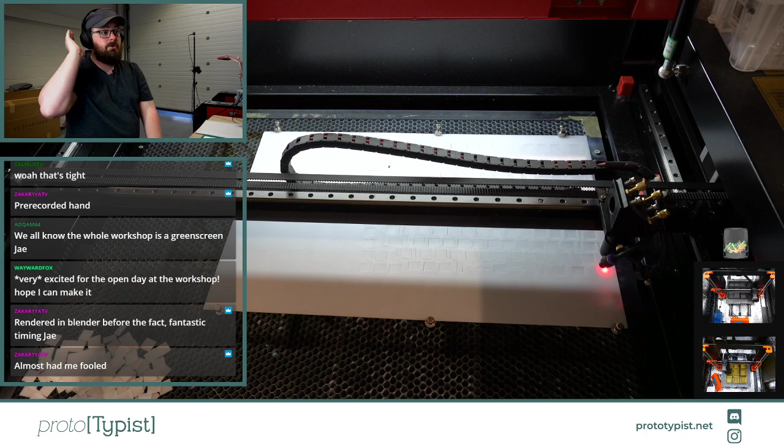I had an Ender 3 before it, and I would not recommend that to anyone because it takes time to calibrate every single print. The Prusas, you set them once and you just keep going and going. I print for 19 hours a day, 7 days a week at least, never have any issues, and I have 2 of those running. They've got over 1,000 hours of print time each, and I've had them both just about a year. You can see them printing in the bottom corner - they're just reliable as anything.

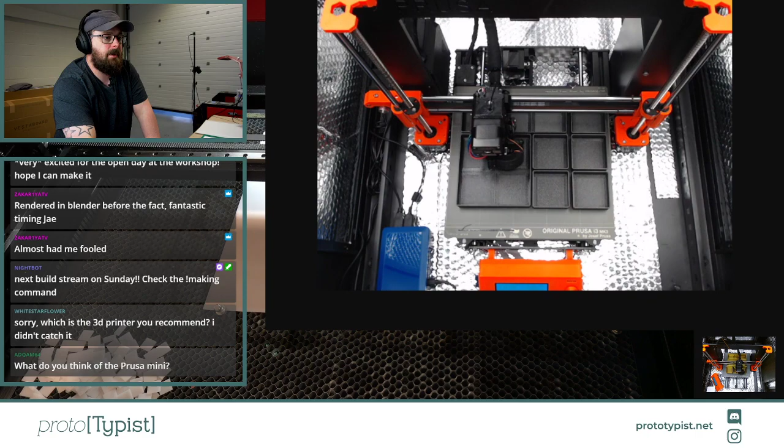The Prusa Mark III is the 3D printer I'd recommend. You can see 2 of them printing in the bottom - let me make one bigger for you. So you can see I've got 2 of them printing right now, that's one of them on its way, and here's the other one going. Those are both enclosures over at the far side of my workshop, the side that you couldn't see before.

We all know the workshop is a green screen. So many people think the workshop's fake. I don't understand why, but so many people do. It's bizarre.

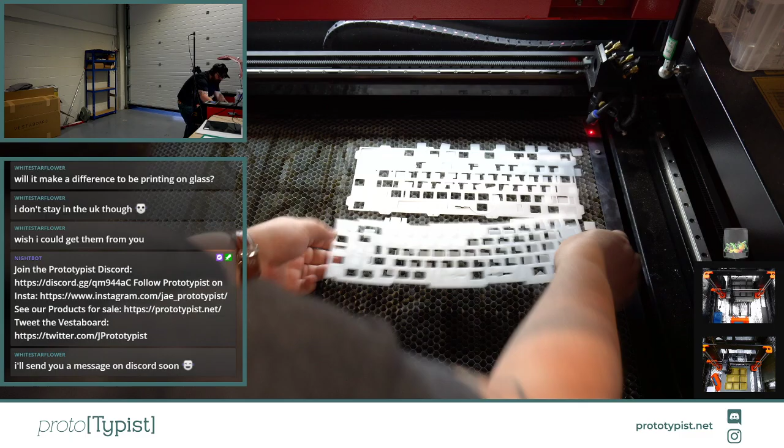Okay, just going to scoop all this to one side.

Pile's getting bigger now.

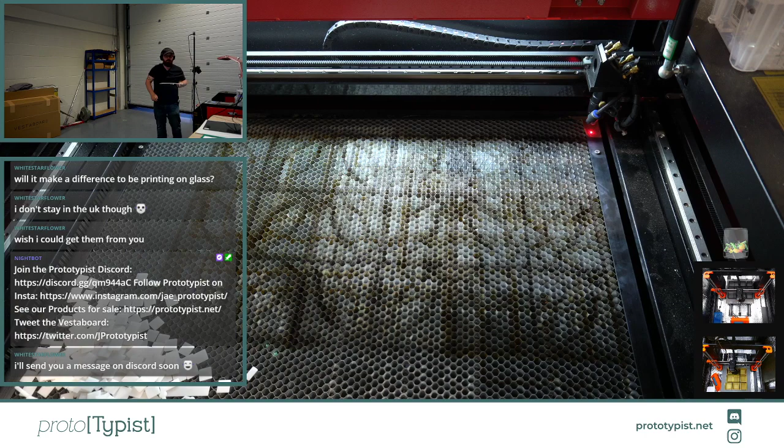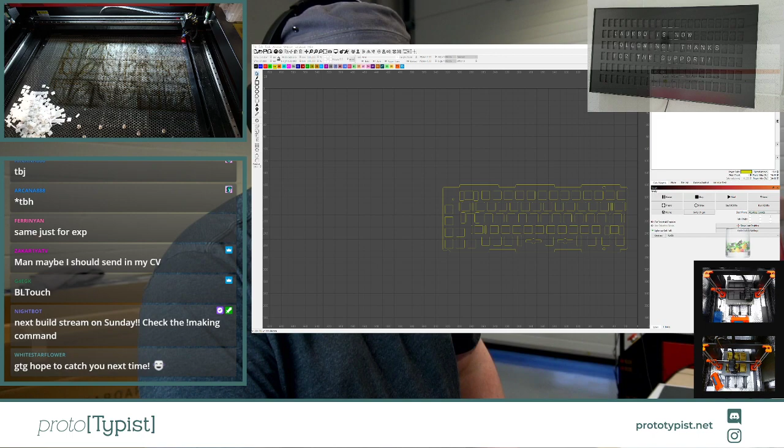Okay, so this is just one, so we can actually use an offcut of material for this one. I'm just going to drag that file over. This is actually already in the absolute correct orientation for us to cut it, so I'm going to move it to the correct spot.

I'm going to delete the old file. I'm going to set this one to be POM, and I'm going to send that over to the machine. Okay, so that's now all in the machine, and this is going to be ready to cut.

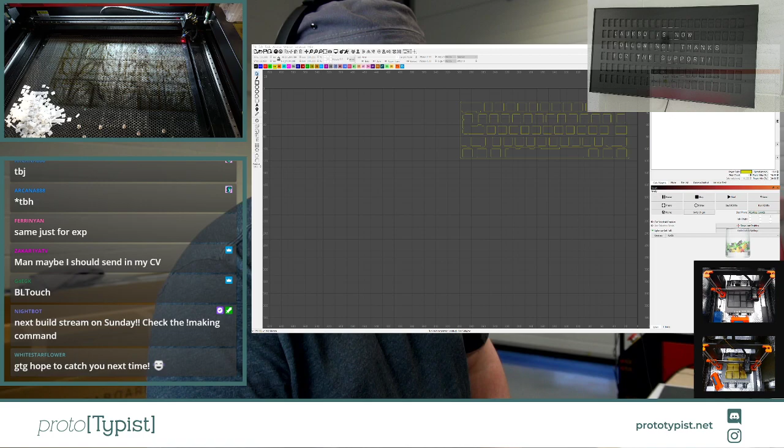But what we're going to do is we're actually going to put one of the offcuts of material that we've got in here, and we're going to cut this using one of these offcuts.

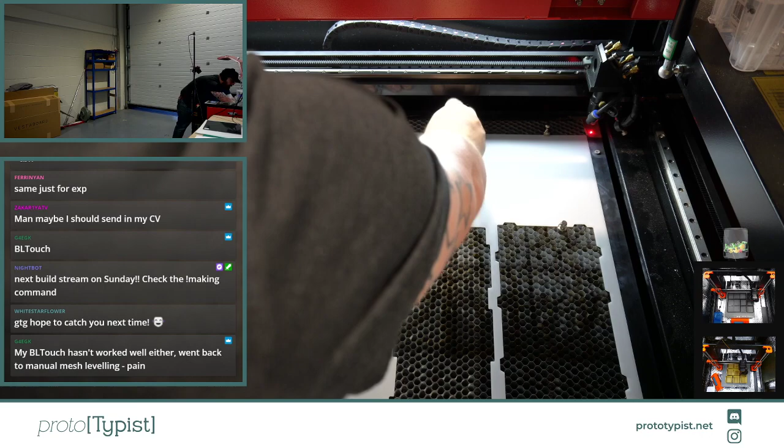I'm going to pin the workpiece down again, as always, just to make sure that we're not having it lift or move on us. There we go. And then we're going to make sure that this is going to cut in the correct place. That all looks good, and this is where we get the most out of our material now.

My BLTouch hasn't worked well either. Went back to manual mesh leveling. Pain. Yeah, I never had good experiences with them, but the Pinda probe on the Prusa, I know I keep talking about them, but it's just so good. It just works, out of the box it just works.

No issues whatsoever. If you want 3D printing to be an enjoyable experience, buy a Prusa. Don't buy, or buy something that's rated.

I really don't get behind the Ender 3. I do have another Creality printer that I've picked up that I need to build at some point, when my back's fully better and I can lift it, which is one of the PrintMills, so it prints onto a conveyor belt, which I'm really excited for. It's actually in the workshop already, so I do want to get that working at some point.

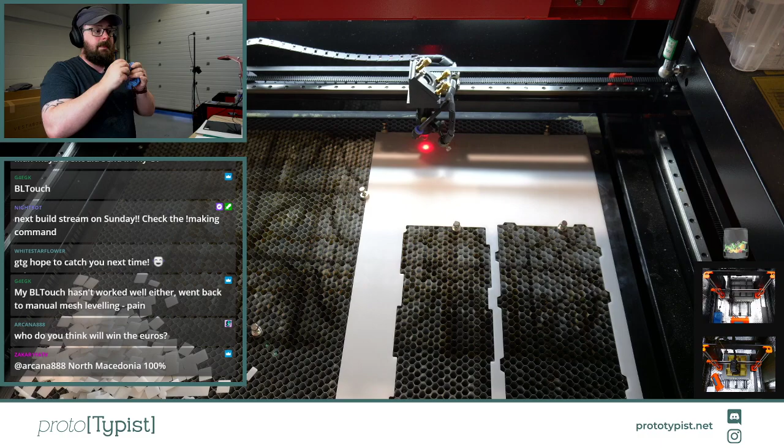Who do you think will win the Euros? I think France is going to win. I think France is going to win. I don't really follow football, so it's just a guess.

Did you get a kit or a pre-built Prusa? I have two of them, and I bought them as a kit, and I built them both myself. I actually streamed the build of one of them a very, very long time ago. But yeah, 100%, build them yourself. You learn so much more about how the printer works when you build them yourself.

North Macedonia, 100%. Maybe.

And just to show you that the 3D printers are live as well, this is a live image. I'm just going to go and wave my hand in there, because people often claim that I'm not printing these live, but these are live. It's a little bit of a walk across the workshop, but yeah, you should see my hand pop up in a second. Hello.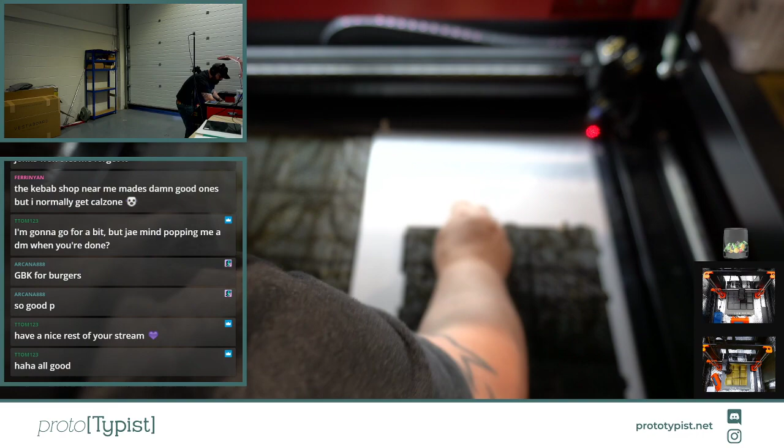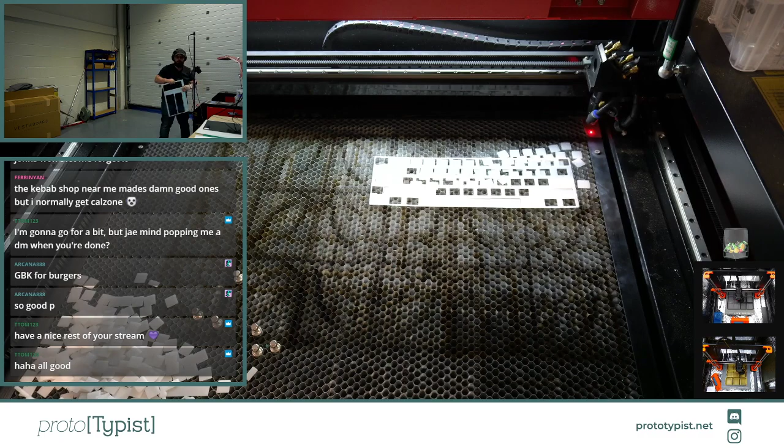He says he can't even pick it up. There we go, that piece is now fully used up, won't get anything out of that.

Okay, let's get one more sheet in now. There's quite a few parts to cut on this one, so we'll see. This next order has, I think, 3 plates. I'm just going to pin the workpiece down again. You could use clamps for this - there are clamps you can get for these mesh beds, but magnets work just as well.

Go. Let's load up the software again, and then let's see what needs to be in this next order. Okay, let me just organize my files, guys.

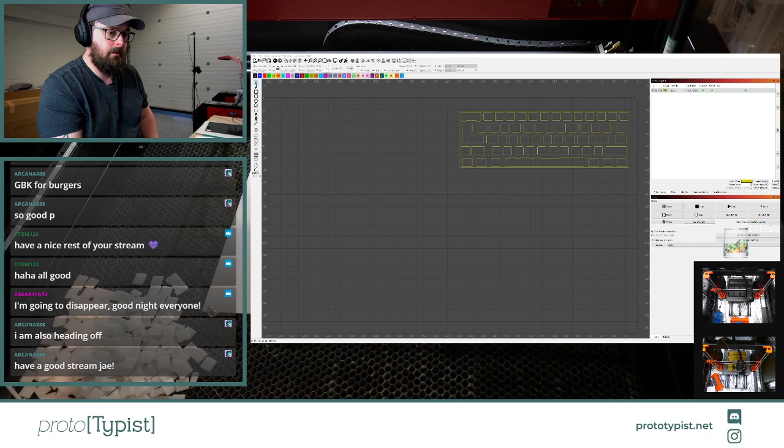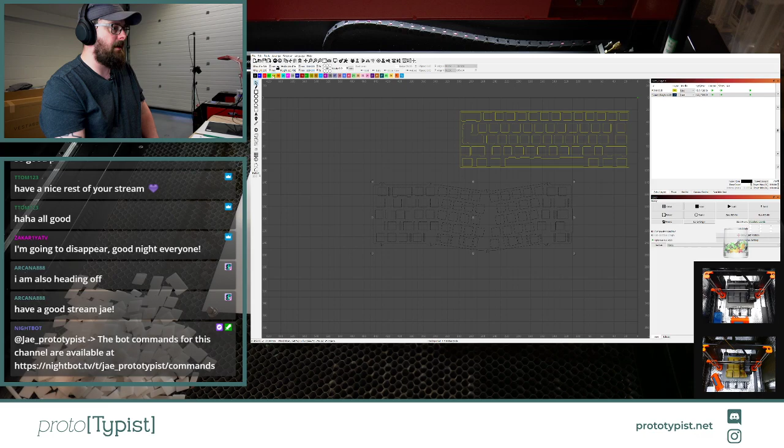Oh, interesting. The next order is for one - I missed the sheet, right, okay, so it's the order after this that's got 3 files for it. So we're just going to drop this in here. This is an Alice style layout, not an actual Alice. We're going to flip this on the horizontal, and make it ready for POM. We're going to delete the file that we don't need anymore, and then move this to the correct place.

I'm going to send that over to the machine. And then we can go back to the machine, we don't need Lightburn for a minute. So we're going to come over to the machine, make sure everything works, and then we're going to frame that, make sure it's going to cut in the right space, and we're going to hit go. There we go.

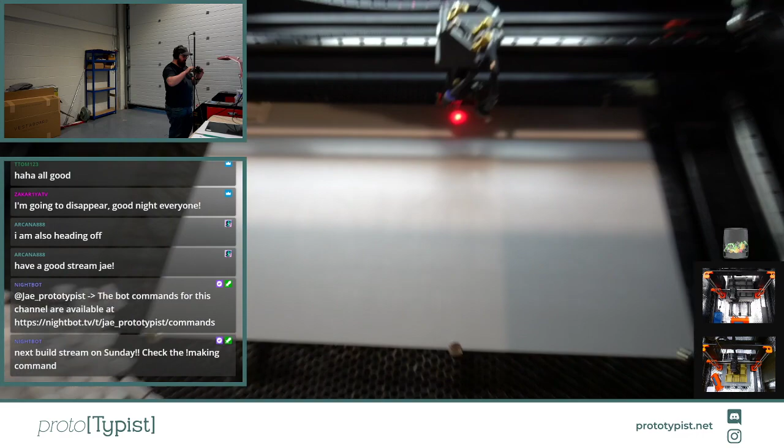Okay, I don't know if you guys can hear those squeaks in the background, but occasionally the material does squeak as it cuts, which is kind of a weird and interesting noise. I'm not sure what causes it either, I assume it's just the noise of the air escaping between the material and the case. Okay, time to just pop all of the parts out of this piece, and then we can put this order down as done. There we go, I'd say these all do need to get cleaned after as well, and that will happen before these are shipped to the customers.

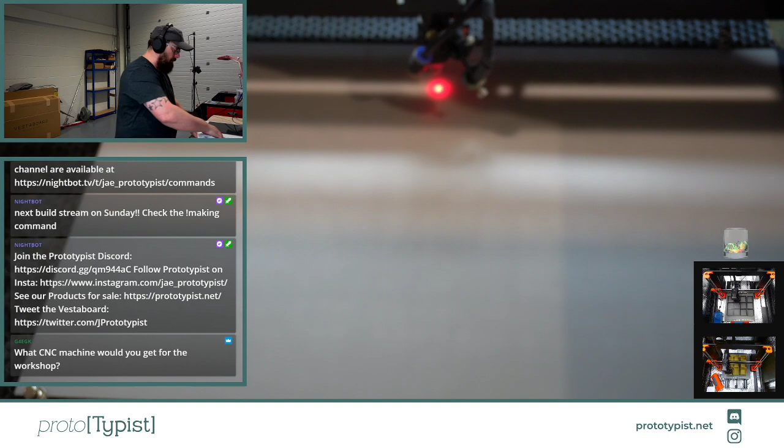Get rid of all of the offcuts off the desk here into the waste disposal. As I say, these all get taken to a local company who turns them into bricks, which is really interesting and cool.

What CNC machine would you get for the workshop? I actually tried to buy a CNC machine from Haas about a year ago. I've talked about it on the stream before. They messed me around with COVID and everything else, but I was going to buy a VF2SS. That was the machine I was going to buy. I have toyed with getting a little Tormach in the meantime, but I'm kind of leaning away from that at the minute.

Bless me, apologies for that, my hay fever is getting really, really bad.

Randall Bolts, thank you so much for being here. Thank you very much, yeah it cuts pretty quick. If you turn the red light off, you'll be able to see a little bit better. There you go. You can see how that cuts pretty swift.

These are customer files for custom plates. Yes, I can't tell you what boards they're for, but these are customer files for a group buy we ran a few months ago, yes. The CF plates are about to arrive in the workshop in the next few days, so it's now time to cut all of the POM plates to make sure that we've got all of the correct files on hand for the customers. So yeah.

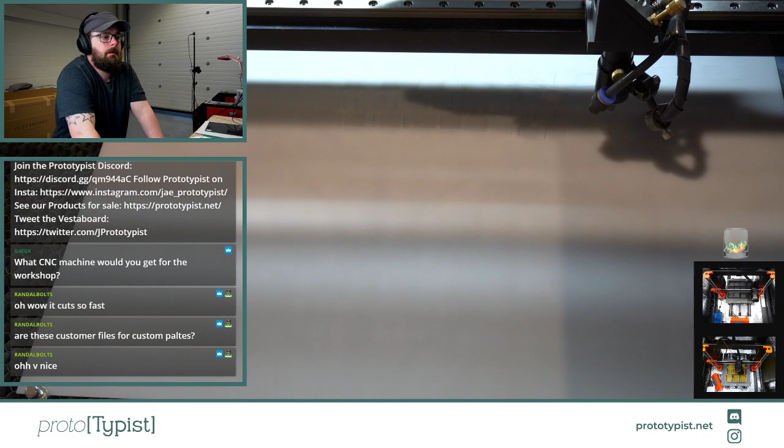I think I need to put some better lighting in the laser cutter as well. Maybe I'll have a look with some LED strips and get some better lighting in there as well, guys.

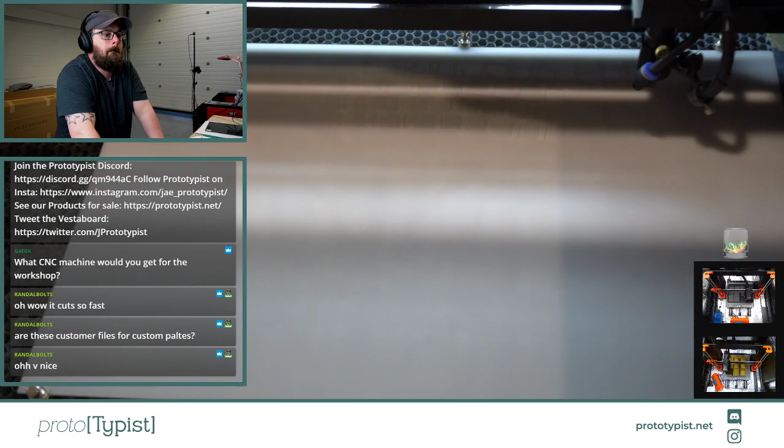Not at the minute, Randall, no. So once this group buy is done, there will be a permanent listing on the website and you'll be able to submit files at that point, and I'll cut them at any time for you. But right now, this is just for the group buy. Once the group buy is done and shipped and all of that is sorted, then it'll be an open service on the website and I'll cut files to order.

But they come out pretty nice. This one's almost finished now. It's going to go do the last few switches, and then once it's done that, it will do the outside edge of the whole keyboard case. Yeah, we'll see what that looks like in a minute.

The VF2SS, yeah, these are like the size of a decent SUV. They're not small pieces of machinery. And yeah, they're incredibly expensive, but they're worthwhile investments in making parts. And if you've got a maker space or you like to make things, they're very, very valuable tools to have. As I say, I have looked at a small Tormach, but it's not quite what I want. It's probably not powerful enough for what I need. So yeah, it's not something I'd be considering right now.

But a VF2SS, I did try and buy one from Haas a year ago, and there was a whole palaver that Salvan was actually helping me out with. So I paid the deposit for a VF2SS, a brand new machine. That deposit was over £10,000. I paid that deposit down, and we agreed a delivery date and a finance plan to actually pay for the machine. Three days before the delivery date, they called me up and said that the finance plan we had agreed they couldn't honour anymore, and they had to make it more expensive. Turned out that it was about £50 a month more expensive, so I was relatively comfortable with that, and I said, okay, that's fine, let's just carry on and get the machine in.

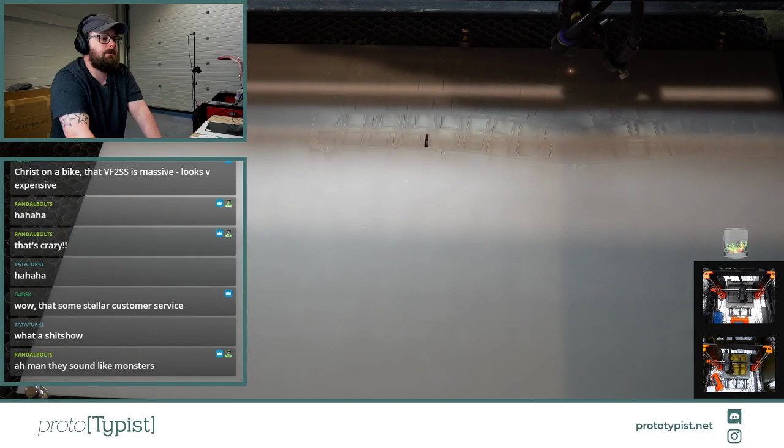It was a long time to get my refund back, so that meant the CNC machine went on hiatus, and I got really frustrated with it. I actually called Salvan one day - I'm not the type of person who cries very often, but I was almost in tears with him about how stressed out I was over it. He was an absolute godsend at the time, keeping me on the straight and narrow. He'd been telling me what tools to buy, what electricity power I needed, how to set the machine up, what coolant to buy, all these things, and he was just really, really good. So if Salvan ever sees this, thank you so much for the support you gave me at that time. It was very difficult and very frustrating.

Okay, I can never pick this out. I don't know why I always try, but I can never actually pick them out.

There we go. Move all this aside, and then we can put the workpiece back in and get ready to cut the next file, which is actually for a separate order, I think. I think the next one is going to be for the larger order, so we'll see in a second. I think all of these have been for 1 plate so far - I think the next one actually has 3 plates in it. We'll see in just a second.

Yeah, it was a bit of a shit show. It was horrid, but it was a process I had to go through, and now we've been through it. We've come out the other side a little bit stronger. So every day is a school day, guys.

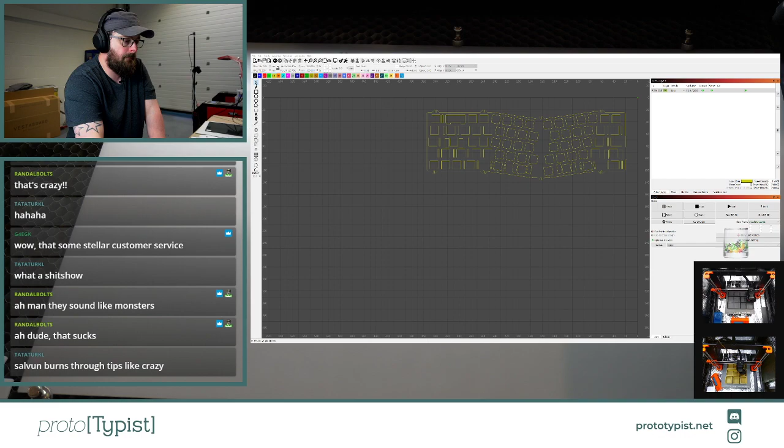Okay, time to do the next order then. So let me just check the order number I need.

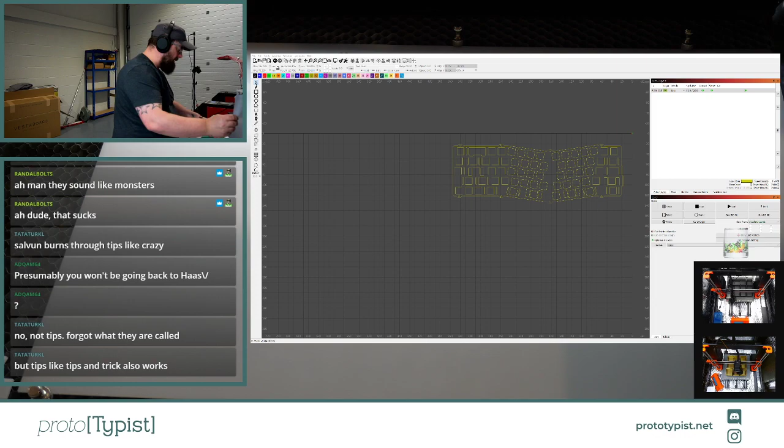Okay, interestingly enough, that order isn't there. Okay, great. Why is that order not there? Okay, let's put that to the back of the pile. Perhaps these are files that I need to dig out from somewhere. Let me take a look at these - the last 2 orders. Yeah, okay, so it looks like the last 2 orders I need to find some different files for.

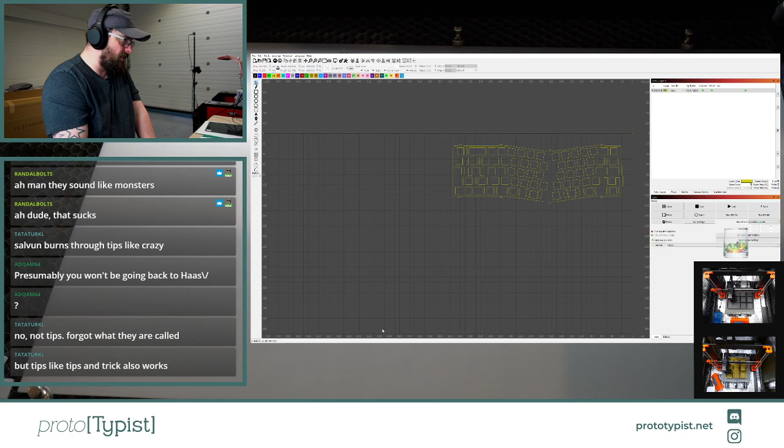So I think that is actually prematurely the end of the stream, guys, because I have streamed me cutting everything I can for today. Let's flip back over to the other camera for a second. So yeah, I think this is the last one I can do. So once we post-process this, that is going to be the end of the stream. But that is what it is. We'll find someone to raid in a minute. I do appreciate you guys being here. If you've got any questions or want to ask me anything before the stream ends, now's the time to get it in, because we're running out of time quickly. And I need to go check where these files are so I can cut them tomorrow.

Okay, almost there on post-processing this. As I say, all of these do get cleaned down before they get shipped to customers as well. Okay, and that's there - that's 10 orders we've made today for customers. 10 orders in one stream.